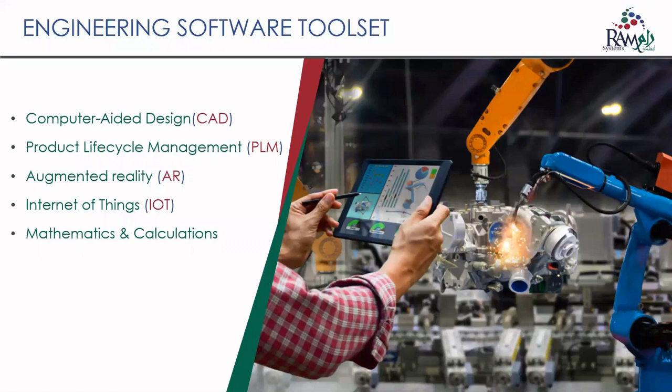Also the Internet of Things is part of Industry 4. And mathematical calculation is one of the tools that we need everyone to master.

We expect any engineer to have it, because it's one of the mandated tools that any engineer should adopt, and we're going to explain this further.

So if you go back to the evolution of design since the last century, the 20th century, the revolution of industry started with engineers drafting their designs using normal ordinary tools.

You'll find a lot of engineers drafting their designs using the normal ordinary tools, which are paper, pens, and rulers, as you can see here.

They spend a lot of time drafting by hand. It consumes a lot of time and a lot of manpower. And in reality, the design element is very minimal.

Then with the computer revolution, the third revolution, we introduced the personal computer, and everyone has his own PC. A new software came up in the field, and they introduced 2D CAD design. So you find a lot of engineers doing some design, but at the same time, they waste most of

their time documenting, trying to save the file, record it, and share it with others. With the next revolution, new software came in 3D. Many companies introduced 3D software. So you find engineers start doing design, but they're still spending their time creating geometry.

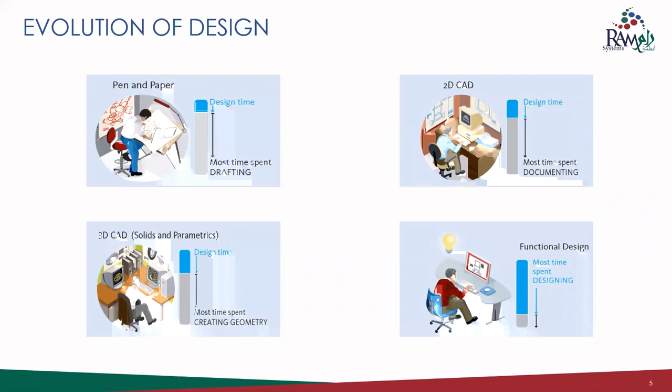Also, we can talk about a similar thing for engineers. At the beginning, engineers used mathematical solutions, writing equations using pen and paper and a blackboard.

They tried to document it using the calculator when it was introduced, and then with the revolution this also became software. They used programming tools like Fortran, C++, and with the revolution came

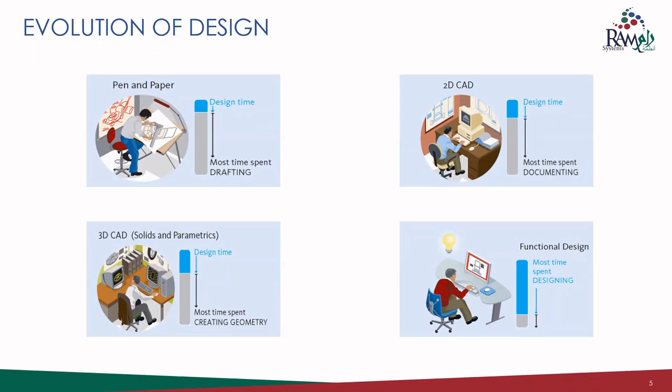If we are, inshallah, in Saudi Arabia heading to Vision 2030 to be an industrial country, this is one of the most important elements that any company should adopt to document their ideas and their solutions.

Okay, first we talk about CAD, the definition of CAD. I think most of you, the majority, should be aware of what CAD is. It is computer-aided design, using the power of the computer to create, modify, analyze, and optimize the design.

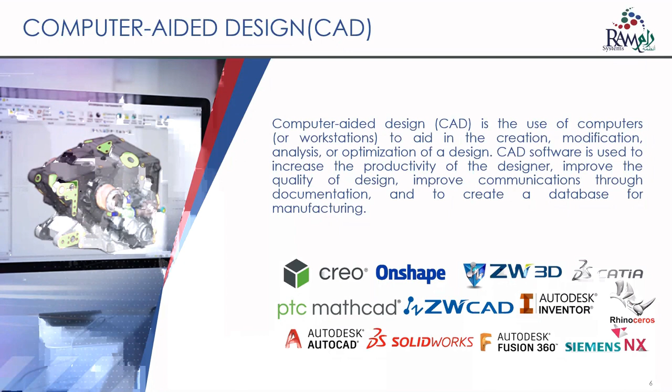Using the software increases productivity of the design, improves the quality of the design, and improves communication and documentation of these documents. There are many companies in the market: Creo, OnShape, CATIA, ZW3D, PTC MathCAD. All this software adopts the CAD design.

Before you start jumping to MathCAD, before jumping to CAD software, there are many softwares, as we saw in the previous slides. So you think, okay, what is the best CAD design I should learn?

Okay, there are 5 areas, or 8 areas, of CAD significance. So when you think about using any CAD design, you need to keep in mind these elements or these areas. The first one is the concept of the design.

Concept of the design is how this software, as a CAD software, helps you demonstrate your thought in an easy way, in a flexible way, as a quick solution. You need to make sure that this software allows you to do freestyle, so when you draw something, it automatically transfers your hand drawing into a parametric one.

And second, you need to consider whether your product, or the thing you are working to design, is complex or large. If it is, then you need to choose the right software, because some software has constraints and you cannot use it for these purposes. So it's very important to define the functionality you need before you jump and choose the software to start with your product.

So now when we thought about the solution, what is the high-end solution? High-end solution is the best products in the market that has most of the functionality that big enterprises or big businesses need. So when you look at this, there are three main CAD companies: PTC, Dassault, and Siemens.

PTC has Creo, a very well-known software, which used to be called Pro/ENGINEER. CATIA is one of the high-end tools, and maybe most of you heard about it or saw it. It's a software that the aerospace industry used a long time ago to design complex aircraft. And NX, which is from Siemens, is also one of these tools.

So if someone said, what is the best tool, the most powerful tool, what tool should I use or learn? In my opinion, there is nothing you can say is the best, because all these companies are evolving every time. Every year they release a new version, introduce new functionality. So every year has a different scale. You cannot say Creo is the best tool in the market for designing any product, from a small coffee machine at your home to a space jet, aircraft, or rocket.

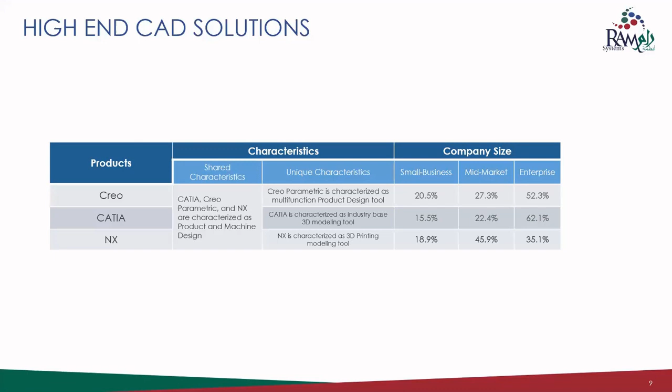So we can see here the company size - usually these products are used by the high-end business because they're very expensive, but very powerful tools.

So when we go back to the comparison, we go to the medium-end CAD solution. Medium-end CAD solution includes Inventor, SolidWorks, ZW3D, Rhino, and Solid Edge. Inventor is from Autodesk, and SolidWorks, maybe you know, it was a standalone company, but it's acquired by Dassault, the same company that is from CATIA.

ZW3D is a company from China, but they are trying to introduce a good tool that merges CAM and CAD, so they have some good tools for manufacturing. And Rhino basically started for construction, but they deviated and started doing some good work in 3D, though they're still behind. Solid Edge is from Siemens, the younger brother of NX.

And back to the lower end, or we can say the 2D category, there are two tools. The famous one is AutoCAD - maybe everyone knows it, and it's famous because it's a very old tool, and its main business is in 2D for construction, but they have some 3D capability. Also ZW-CAD is adopting a similar approach to AutoCAD, and they are competing in the market and fast growing.

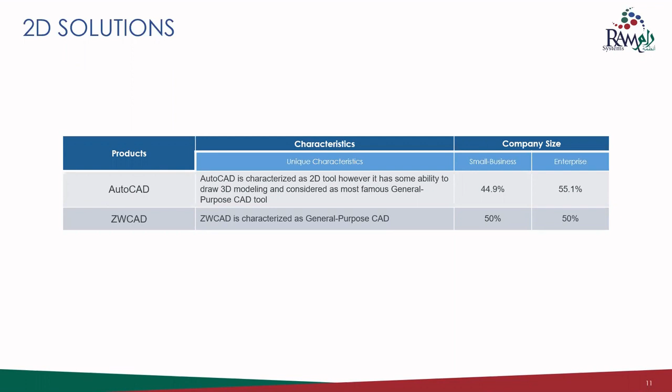Now there are new tools in the market, and this is called cloud-based CAD solution. Why do they call it cloud-based? Because you don't need a strong or high-end workstation to design. It's very easy - basically you just select the order, and all the simulation and rendering happens in the cloud server. So it allows you to make a model through your mobile phone or your iPad. Basically, we can say it's CAD on a cloud base.

But what is the difference between, for example, Onshape, which was recently acquired by PTC last year, and Fusion from Autodesk? Onshape is based on a PDM system, so basically it's a PDM system, while Fusion is a CAD tool - and it's a very good start.

I advise you as a student to go and learn to use it. There is a free subscription for students. You can download it and start learning from day one how to design, and you don't need to store your data on any computer - it is in the cloud base. Fusion does that too, but Fusion has some characteristics supporting CAM and CAE, and they have a different approach, but it's still a good tool to start with.

As you can see here in the augmented reality, they introduce designs like the UAV and how its operation is introduced. You can see how the operation works, how they design the factory and the system, and how support from the manufacturer and the industry helps make changes to prevent issues and help the user fix it.

One of the leading software in the market is Vuforia. It helps a lot of companies introduce their products and collaborate at an industry level.

For IoT, Internet of Things, most of us know that the internet is connected with lots of products in the market. As a new engineer working to produce a product for the future, you need to build your product connected with the internet as well.

When it's connected to the internet, you make a UID, a unique identifier number, and all the sensors in your product transmit data to the system or server. This gives you a dashboard to understand the issue, how to fix it, and how to maintain it.

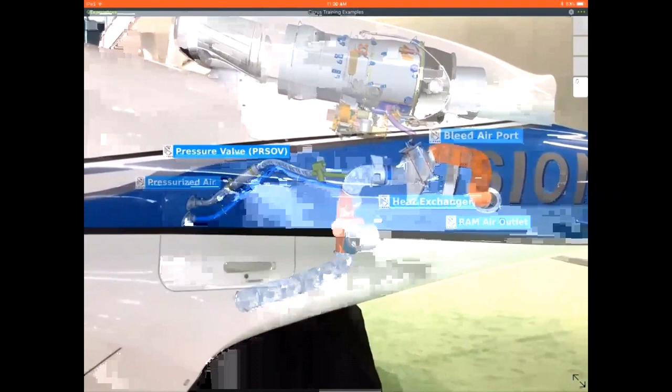The technician comes to the aircraft and can monitor it through AR technology, also linked with IoT, PLM, and CAD files.

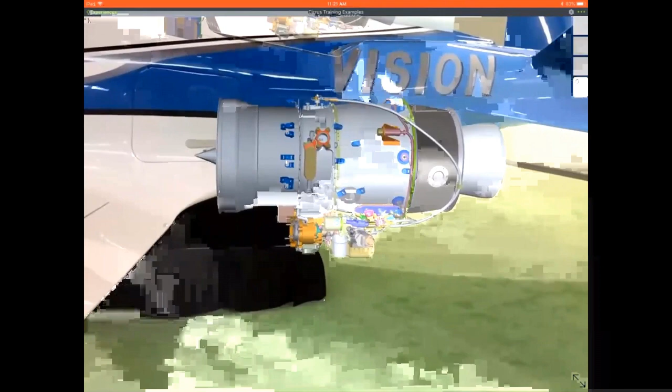He can see everything without needing to go check the manual. He can visualize the system, how it works, and if there are any issues he can figure out what needs to be fixed. If he needs more information, he doesn't need to go back to the manual to check how the product, component, or system looks like.

He can see it and visualize it in real time, during work. So he's saving a lot of time and becomes more efficient doing his work.

It also helps to teach new technicians how to do servicing, what is the caution area, what he needs to be aware of,

where it is in 3D dimension. So it automatically tracks his positioning through the product that he has.

Because of time, this clip is on the website and on YouTube. If anyone wants to see more, they can approach us, and we can send them this presentation to look at.

So now all the companies are working toward the future. They are working on adopting something called digital transformation, and this transformation is about how to interact between the digital data and the real product, the physical product.

So how do we make it together? This starts with the design - how to make the calculations, how to determine what your product will look like, before you transfer it

to manufacturing. You can also share it with the customer, share your thoughts with the customer and get feedback in the design process, and also involve the manufacturing engineer.

So instead of saying 'I will manufacture this with a 3D printer' and then finding out the 3D printer capability you have is not sufficient, and you need to make some expansion, or change your design in the later phase.

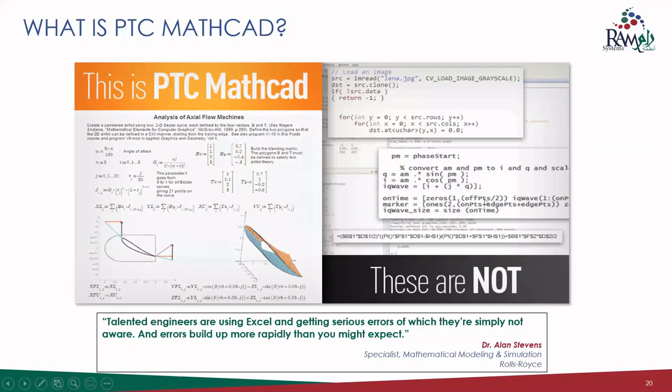So what is MathCAD? MathCAD is about an engineering notebook and calculation. So you can write and do the calculation, and it's very clear to get, rather than programming. And if you have an error, it's very hard for you to reach the error. So MathCAD is a digital engineering notebook to perform your engineering calculation combined with documentation and manage your design.

So it's basically for analyzing your design or calculation and solving your problem or equation, and then documenting it and sharing it with colleagues or working together to reach a solution, because engineering is about finding the solution for a customer.

So MathCAD is a standardized mathematical notation. As you can see in the figure on the left, it is very clear to read, get information, and find what the process is here, like minus, subtracting, etc.

And it has comprehensive support for units. As I mentioned in my previous example about NASA and the vendor, the unit miscalculation and mistranslation between them caused a very big error. So when you are sharing your document in MathCAD with your colleague, the unit is automatically changed. If you are using SI units and your friend is using pound and British units, you need to translate the unit, but MathCAD solves it for you. If you are comfortable with SI, it will show you in SI. If you are comfortable with British or American units, it will show you in that. It makes your life easy, simple.

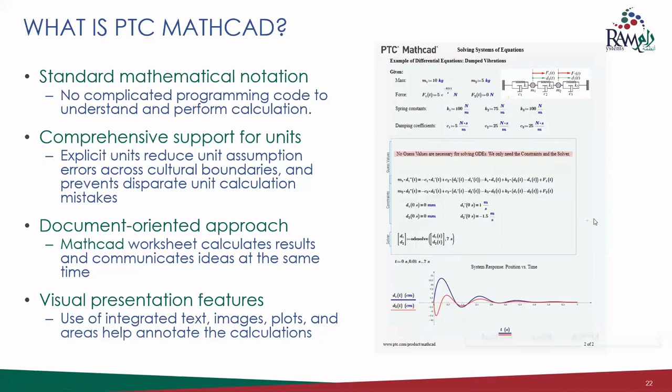So it also has a document-oriented approach and visual presentation features, as you can see. You can see it very clearly and understand it the first time. It also enables enterprises to prevent loss of intellectual property, keeping your intellectual work under your name so it doesn't get lost, because it is very difficult to share or give information otherwise. It also helps optimize critical design, and allows engineers to quickly and easily solve and document, combining text, math, and graphics, as you can see here, enabling knowledge capture.

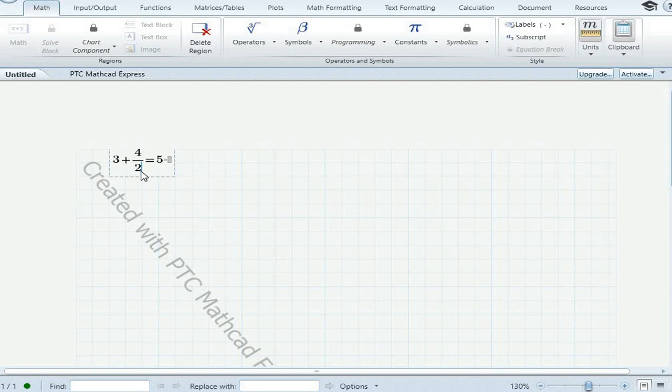The best part about MathCAD is it is live, and it is interactive. Let me show you what I mean by that. You see this equation written, you already have the answer. Now should you need to change any of these, all you have to do is click at that point and say, instead of 4, you want to do 4 divided by 2. Just press the divided by sign and type in 2. Then just click anywhere, your answer will be updated. That's it, it's that simple.

You can multiply this by say 12 and you get a new answer. You multiply this, you subtract 1 from this, that's it, you get an answer. It's real time, it is that simple.

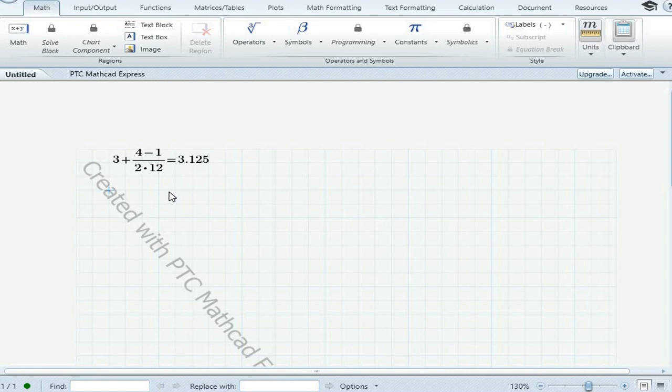Now let me show you how we use a few complex operators and how you implement or directly get constants. There are a lot of constants used in maths, the most common is pi, right? So if you want to find the circumference of a circle, get a text box and write the formula here: circumference of a circle is equal to 2 times pi times the radius.

That's that, you move it here to the side and then you can start your calculations beneath. For that you have to use this text box, and now you start your calculation: 2 times pi. You can either write the value as 3.14, but then that is not the point of MathCAD. MathCAD is there for easing your work and making it as accurate as possible. You don't need rough estimations when working with MathCAD, so you can actually get the exact pi value.

For that, you can either go down in this drop down and from here select pi. When you bring your mouse cursor there on pi, you see there is a shortcut in the bracket written, and that is P, small p, and Control G. For any Greek letters this works. You want delta, you type in D, Control G.

Now let me show you here how you get that pi. Just type in P, and then Control G. That's it, it's pi now. Say the radius of your circle is 7 centimeters. Equal to, that's it, you got your value. And then suddenly you decide, oh no, I want to work on a different circle, maybe it's 10 centimeters now. That's it.

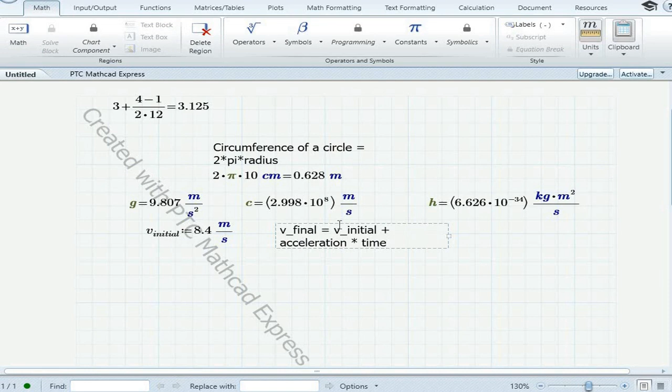Now let me write this formula here: acceleration times t, v is equal to u plus at, the very common equation that we have been using in physics all the time. So you have the initial velocity, you have g, that is gravitational acceleration. Now note that I'm not writing time here yet. Now let's see what I'm trying to do.

Now you need v, you again use the definition operator, not the equal to sign. V is equal to v initial plus g times t. You know that you have defined a value here for v. V is the final velocity, and all you have to do is type in v, press the equal to sign, and you get the value. Now despite t being defined after this equation, it is still evaluating, because t is a global variable here.

No matter where you use it, before defining it will change the values everywhere and give you this final velocity value with units. You can obviously change the units. Say you want it in kilometers per hour, so erase this, type in kilometers, and instead of seconds, make it hours. That's it, it's 206.76 kilometers per hour. How easy is this calculation?

Instead of evaluating this here, you can evaluate this expression in line. Let me show you here. Just click here, and after you have defined that equation, all you have to do is press the equal to sign, and you get the value along with the units.

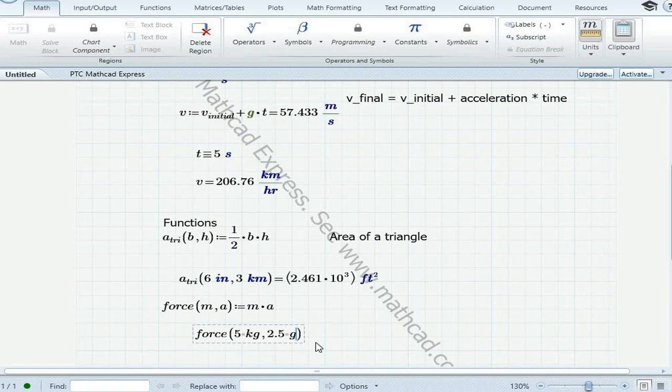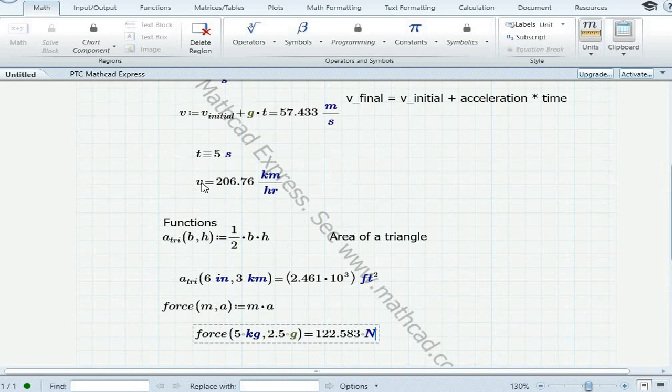Now let me show you a bit more complex, you could say, a function for calculating force. You know the variables, mass and acceleration, and force is mass times acceleration. So F, force is, say mass is 5 kg, and the acceleration is 2.5 times g. You don't even have to press the multiplication sign, all you have to do is type 2.5 g and it will automatically multiply. That's it. You have your force in Newton. Mind you, this is the most striking feature for me of MathCAD.

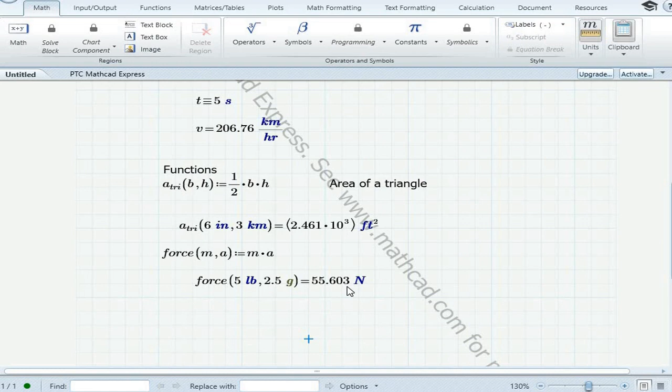So g is 9.807 meters per second square, and then you give your weight, and you get it in Newtons. So if you change this into pounds, that is lbs - I think it's lb, let me check it. You can always verify that from here. Mass is, yes, it's lb. That's it, 55.603, yes approximately half it will be. As simple as that.

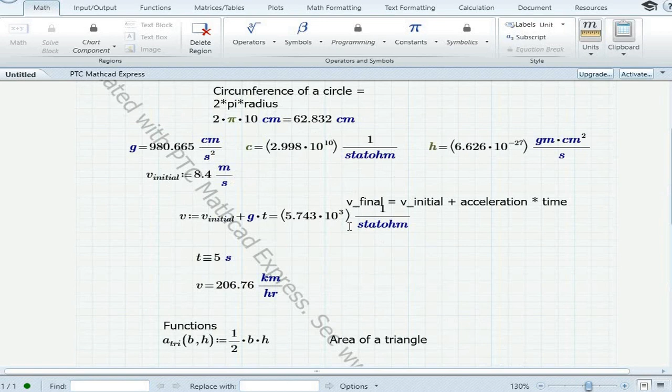Now say suppose you want this in CGS units. Highlight it, convert this to CGS. That's it, as simple as that - Dynes, because now you're using the CGS units, so it will change all the units accordingly.

Now let me show you one more very interesting feature. What if I tell you that you can create your own units? Let me show you how to do it. All you have to do is type in any variable you want. Say suppose you want, I'll use the initials of my name, MBM, as a new unit. And this unit, say it is the unit for momentum, because we don't have any particular named unit for momentum.

So let MBM be a unit for momentum, okay. Before you define it, you have to press Control and Q. That will change the label to blue. You have to see that it is changed to blue - when it's blue, you know it's a unit. Or else there's a keyboard shortcut, a GUI button: select MBM, go to labels, select units. And now you have MBM as a unit of momentum.

So it's always good, if you're using new units, to define it globally, because you'll be using it throughout your worksheet. So click global definition. This is equal to kg times meter per second. Okay, so kg times meter per second is momentum.

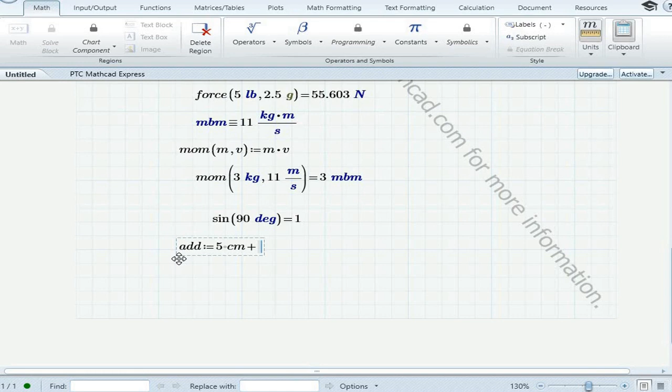One more thing, let me show you this. Say we add different units - let's see if it allows you or not. Say 5 centimeters plus 22 kilometers minus 22 degrees. Let's see if it evaluates. Look, it will give you an error just stating these units are not compatible. So all you have to do is change this to say inches, and then you will get the final answer in SI units. As simple as that.

You can extract data from Excel sheets right here - again, just basic things, and if I go into the details it will take a lot of time, so let me just tell you the functionalities you can explore. You can extract Excel files, work with that extracted data, then plot different kinds of charts and graphs. You can manipulate them as you like, edit it to make it visually more aesthetic, plus save it in different image formats like JPG and PNG. So you can easily transport and transfer it from one file to another, or one person to another, or one department to another.

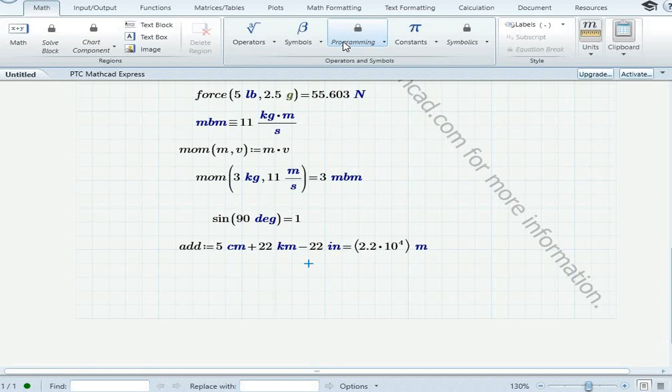Some of the functionalities - I keep saying this because there are at least 400 built-in functions which can be used in different combinations to give you different kinds of results.

Okay, Mr. Mohammed, can you talk about your experience as a MathCAD user and MATLAB user?

Yes, I'm actually a very new MathCAD user. I haven't used it since long, but whatever I have used, I honestly really liked it. It's nice, easy, very easy - I would say easy to use, easy to understand, easy to share with, and very clean layout. There isn't anything like a separate place where you have to do your calculations, and then a different file for presenting. No, it's everything in one place. You can have very nicely written text describing the equations or formulas you're using, and associated images, plots, graphs, everything explaining everything. It can be a proper textbook page. So I really like that feature about MathCAD.

And one more thing, all of you here are aerospace engineers, right?

You can raise your hands. We'll make it a little bit interactive, I believe.

Not only aerospace engineers, in fact all engineers have to use symbolic differentiation and calculation. Thank you for the raise of hands. So all of you know you have to use calculus, be it differentiation, integration, or partial differentiation, many times over a number of courses, and that's probably a very good thing.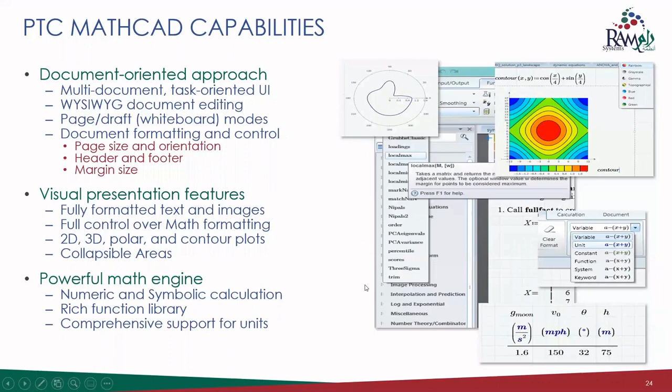I will continue about the capability of MathCAD. As I said, it is a document-oriented approach with a visual presentation feature and a powerful math engine. It also has advanced engineering math tools, as you can see, matrix programming, and so on.

It also integrates with other products, like CAD, Creo, Windchill, and also Excel. So if you are working in Creo and you have a cylinder and you need the area of the cylinder, how did you get it? Why are you choosing that method? You can go to MathCAD where you document your answer and why you chose it. So it is integrated with each other.

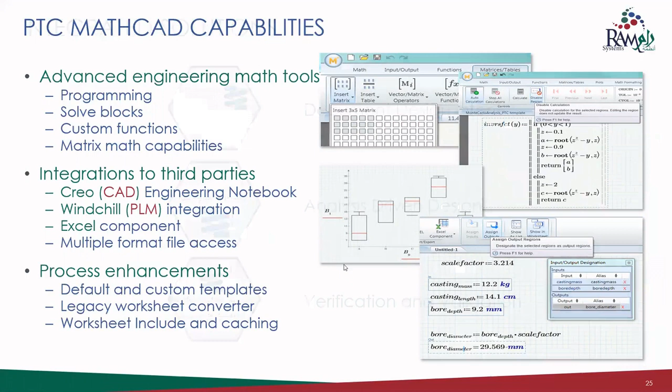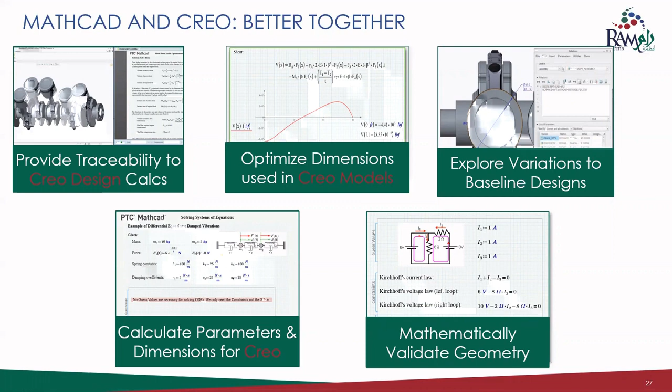And there's process enhancement. As we said, it supports documenting design intent, analysis-driven design, verification and validation. And since it's integrated with Creo and Windchill, you can see exactly why you're choosing certain parameters, working together to provide traceability to Creo design calculations, optimize dimensions used in Creo models, explore variation to baseline designs, and calculate parameters and dimensions for Creo mathematically valid geometry.

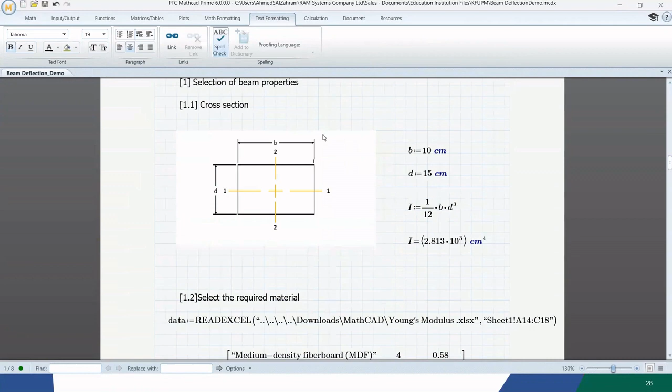So I will show you a quick demo here about MathCAD and how you can use it. As you can see, it's like a word document. If I want to get bigger, smaller, change the shape, color to yellow or black, I can choose. It's like you can document anything you want.

I will go quickly because of the time. You have calculation, easy and fine. I can change the unit, as Mr. Muhammad said, and if you have a cross section and want to change the color, you can do it very easily, then exit.

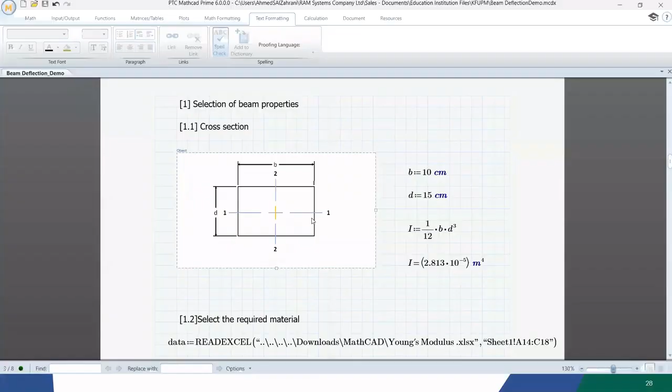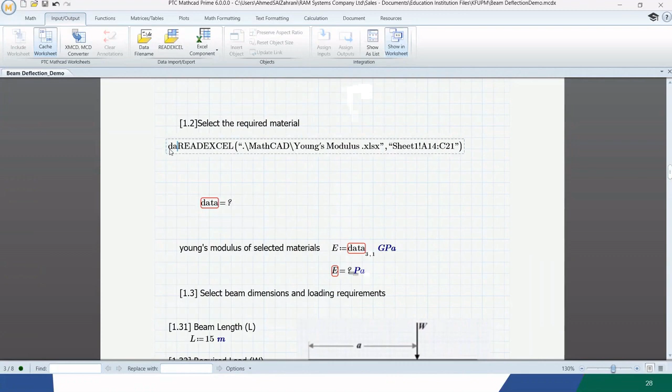And update it quickly. Also, as Mr. Muhammad said, you can get information from Excel sheets, as you can see here. We can get this, anything you want, just click. It's as simple as this. We'll define this to get the information we need, and as you can see, it's updated very quickly.

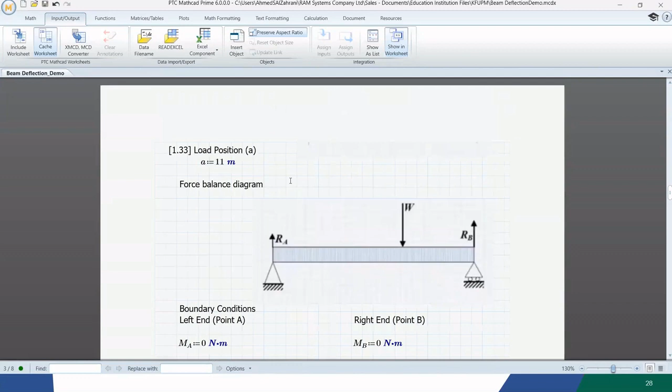And you can choose the unit and get data from the Excel sheet. You can also put figures to explain and elaborate more while you're choosing.

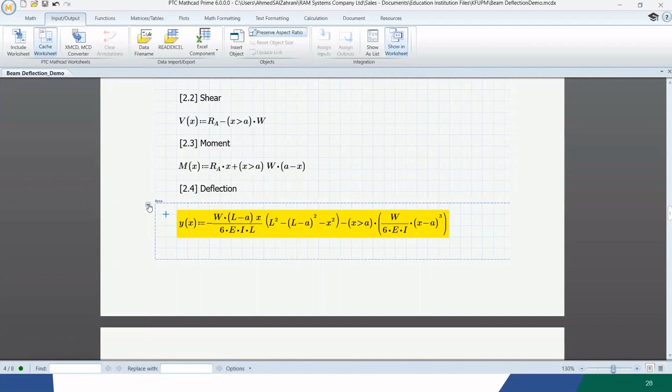Also, I believe this is a very interesting function, because if you work very hard and find an equation and want to protect your IP so it can't be used without permission, you can put a password on it and also hide it. If you want someone to get the calculation, they can easily find the result only, and it protects your IP so no one can take it and steal it from you.

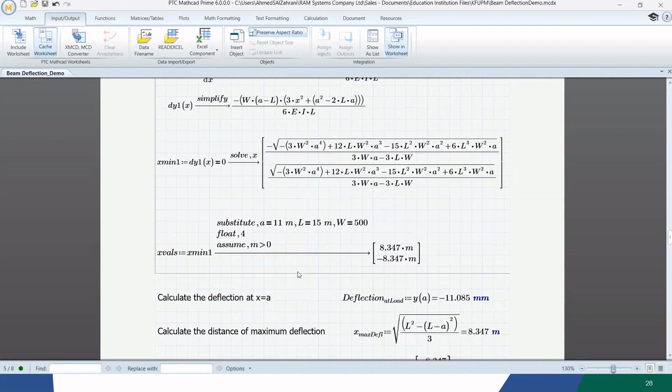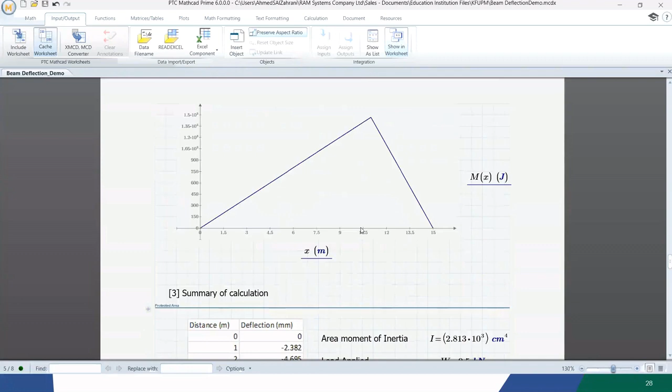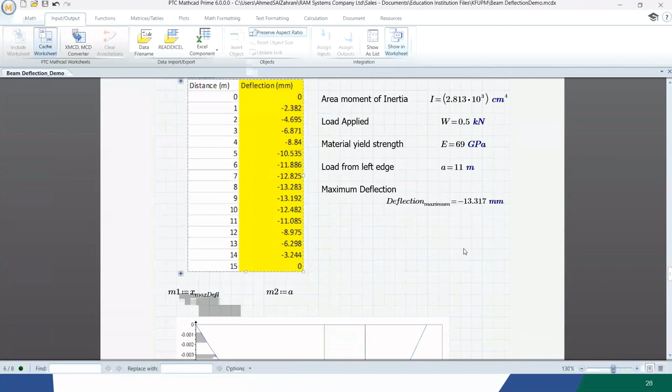Also, if you have a very heavy calculation that isn't interesting for your colleague, and they just want the answer, it's easy. You can see this is the plotting, it's very easy and very clear. You can also get data from an Excel sheet, do what you want with it, and it updates very quickly, giving you the answer right here.

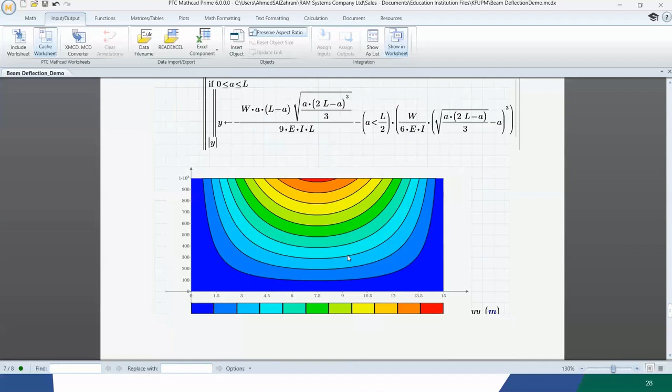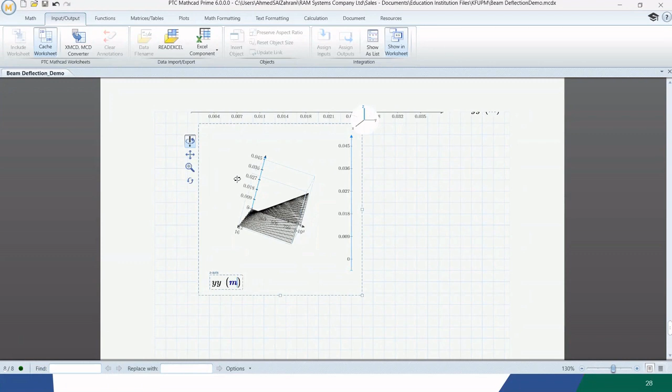Also, you can see here the integration with plots from the Excel sheet. And also you have programming—you can do programming if you want and see the deflection of the beam, see here. And also you have a 3D view if you want to see it in 3D. See, it is a live 3D model. You can see it and see the deflection of the beam as we are editing it.

So Mr. Raid will take it from here. Okay gents, thank you very much Mr. Ahmed and Mr. Mohammed Bashir. We've reached the conclusion—why do engineers need certification for using software? I think this is an important question. Why do I need to be certified in Creo or CATIA or any software? Is it important to have it before graduation, or should I wait until I graduate and join a company, then learn it? This is a very important question, and I will try to answer it here.